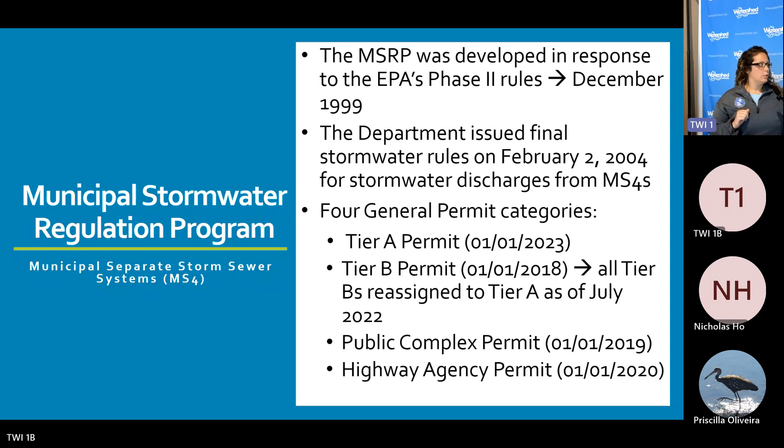So why do we need your help? Currently towns are required to submit an illicit discharge form with their annual report. Currently we've had none or very few notifications from towns about any stream scouring. We've had pretty poor compliance. And our thought, as well as many other groups, is: are there really no illicit discharges or any stream scouring cases across New Jersey in the 20-ish years that the program's been implemented?

So we are looking to record observations of stream scouring and illicit discharges at outfalls during any type of fieldwork inspections that you're performing, if you're with a municipality or a volunteer group. These observations will be forwarded to the towns to correct these issues, and then we'll discuss a little bit with Kristen how this data will be used.

Okay, cool. So now, as Tim talked about before, mapping is really going to be aiding the stream scouring and the illicit discharge aspects of the permit. So the first thing that you're going to investigate at each outfall is stream scouring. So what is stream scouring? It's the erosion or removal of stream bed or bank material by the physical action of flowing water and the sediment that it carries. So these are just a few examples of different outfalls here. The one on the right, you can really see the cutting away of the sediment right on the edge of the outfall there. And that's kind of what we're looking at when we're talking about stream scouring.

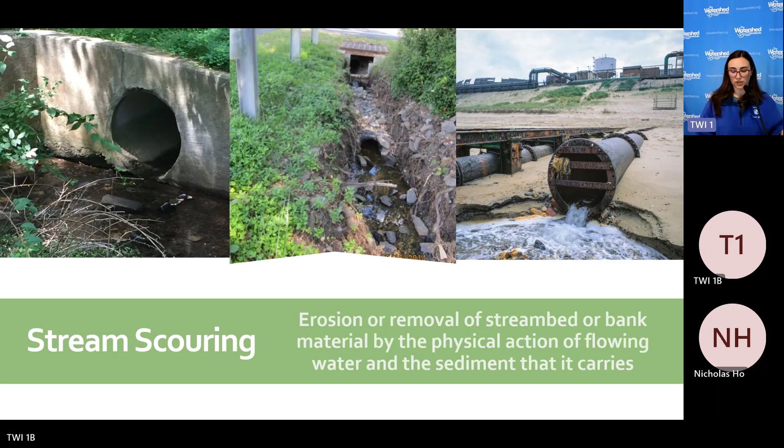The next thing you'll look at is bank stabilization, which is sort of similar, but it's a little bit different from stream scouring as it's concerned with the entire bank of the water body, not just the direct area surrounding the outfall. So on the form that you'll be filling out, there's going to be 3 different options: good, fair, and needs stabilization. So use your best judgment when you're trying to fill this out.

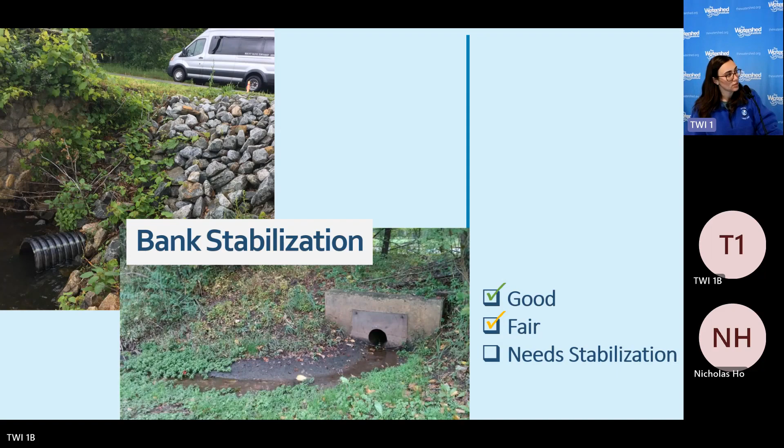So this example here might be an example of good bank stabilization. You can see all the riprap on the edge there, all the rocks helping to stabilize that soil around the outfall. This one here is going to be maybe fair. You can kind of see the stream bed is exposed here. And then this one here is going to be an example of a stream where we really need some bank stabilization. You can see all of the cutting away of the edge here.

And again, use your best judgment. We're giving you 3 options. Just use your best judgment. And also, it's really helpful if you take photos. It'll help us get a better idea of what we're looking at since we're not going to be out in the field with you.

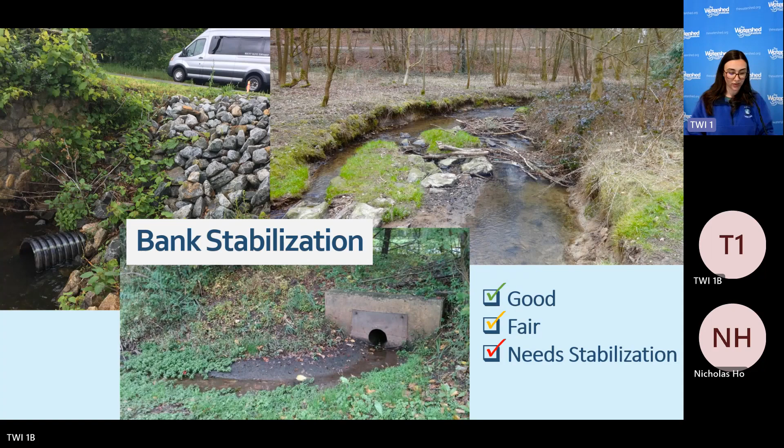Next, we're going to ask for any instances of illicit discharges. So again, Tim kind of went through this before, but it's basically anything that's not stormwater that's coming out of stormwater pipes. So typically you'll see things like domestic sewage, process water, wastewater, and any other non-stormwater discharges like Tim mentioned before. You might see laundromats connecting to MS4 systems.

The biggest indicator of an illicit discharge is going to be what we're calling a dry weather flow. And so that's a flow that's occurring from an outfall 72 hours after a rain event. So if there hasn't been a rain event in three days, there shouldn't be any water coming out of the stormwater pipes. So if there is, that's going to be evidence of an illicit discharge.

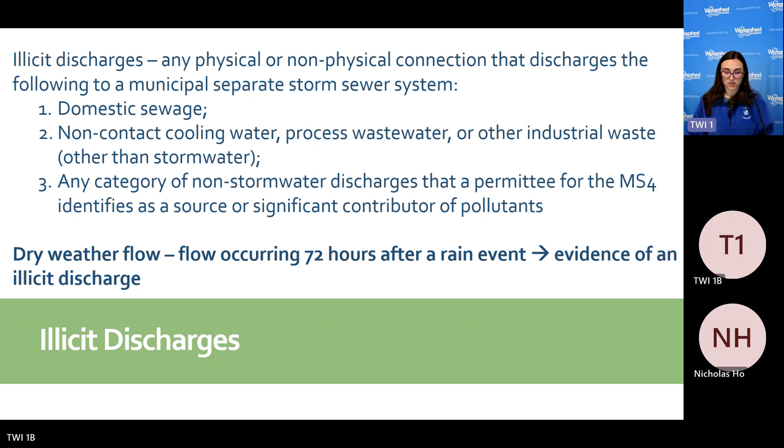Here are some pictures of illicit discharges. So the one on the left here, you can kind of see the water's really sort of murky and shiny. And then on the right, you can see the red color. So typically, again, you'll see the dry weather flow, but another good indicator of an illicit discharge is going to be an extreme odor or some sort of vibrant color.

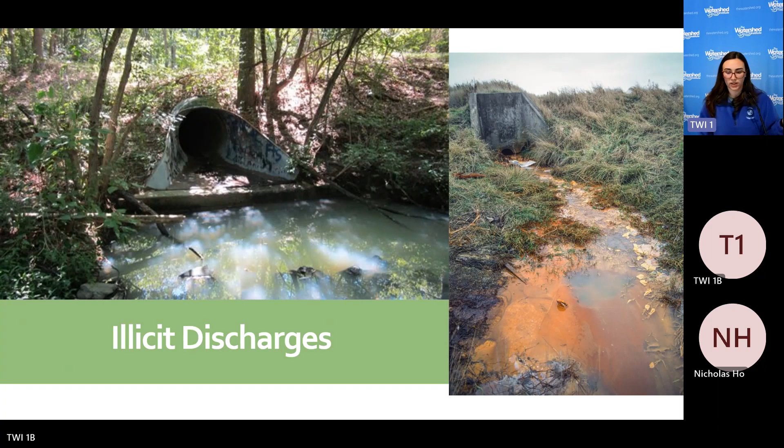So on the form, we're going to ask to identify if there's some sort of foam or oil discharging from the outfall as part of the illicit discharge investigation. And it can be tricky to determine these because sometimes you will see natural oil and foam in a stream.

So how do you determine whether it's naturally occurring or whether it's an unnatural presence, and that's an indicator of an illicit discharge? An unnatural foam is going to likely have a fragrant odor and be sudsy and soapy in appearance. It could also have an odor like raw sewage, and it might be bright white in color. And usually you'll see this coming directly out of the outfall pipe.

Then you'll have naturally occurring foam. That's going to be more of an off-white color. It's going to be caused more from the churning of the water. It won't last long. It might have an earthy odor or more of a fishy odor as opposed to that fragrant, soapy sort of odor. It's usually most prevalent after a rainfall, and you can usually see it downstream of the outfall as opposed to right at the discharge point.

And then next, you're going to have unnatural oil. It's going to have an iridescent appearance, so you'll see a sheen on top of the water. It'll have more of a gas or petroleum sort of smell. And when you try to swirl it around or disturb it, it's going to stick together. And then last, you'll have naturally occurring oil, which won't last long if it's disturbed. When you try to disturb it, it'll break into angled portions.

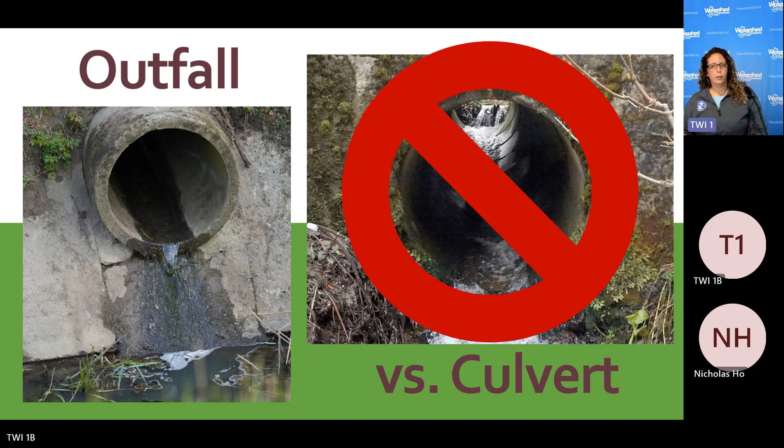That's a good question. So she said, how do you know that the pipe is coming from the MS4? So that would be part of, whether you're going out to map as part of your permit requirements, or you're leading a group of volunteers out to look at the health of a stream. These pipes can be from other facilities, not just MS4. They can be industrial facilities. They can be private facilities. Not that we don't care about those, because we do.

So if there is some form of illicit discharge or there's damage to a pipe or things of that nature, please absolutely report that. And then we'll be able to further investigate, either contacting the permittee or the municipality, and go about it that way.

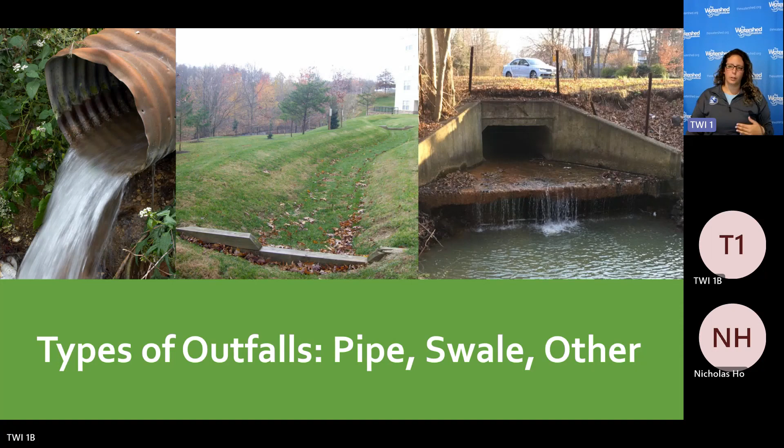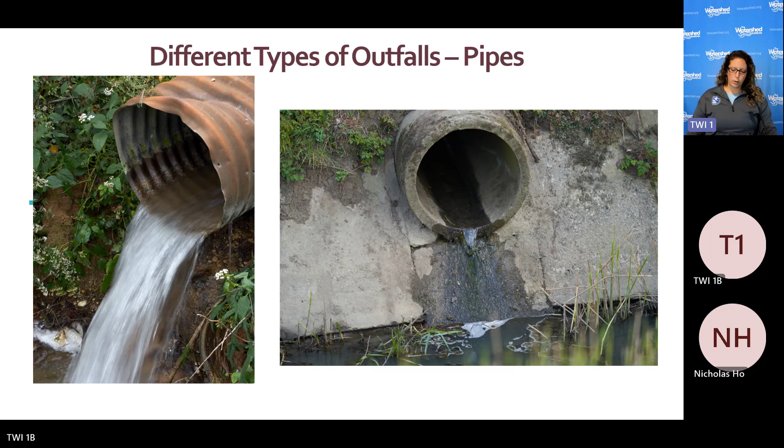And then we have, again, different types of outfalls. These ones are piped. They can be made of a variety of different material, PVC, concrete, or metal. And then here you can see these are also still piped. They just have a head wall associated with them. Some of them may be concrete, some may be a bulkhead, metal.

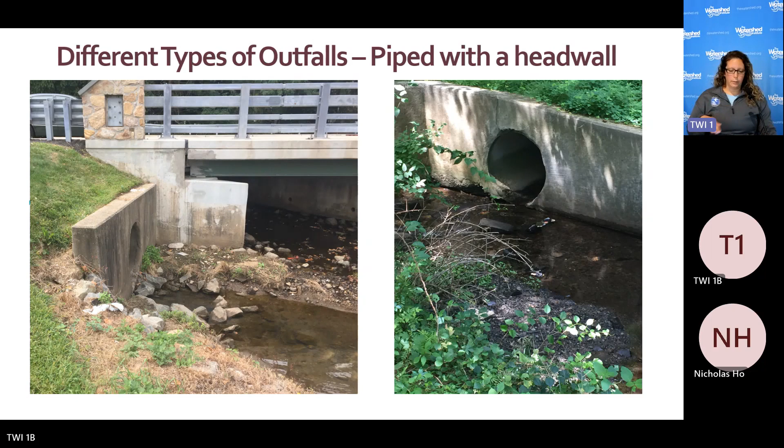And then you can see on the left the stones and riprap on the stream bank adjacent to where the runoff discharges to the stream. And then on the right, you can see a little bit of stream scouring starting to form on the left-hand side of the pipe. And we also have pipes that could be submerged, as you can see on the right, or some that are adjacent to a stream, so within the 10-foot buffer.

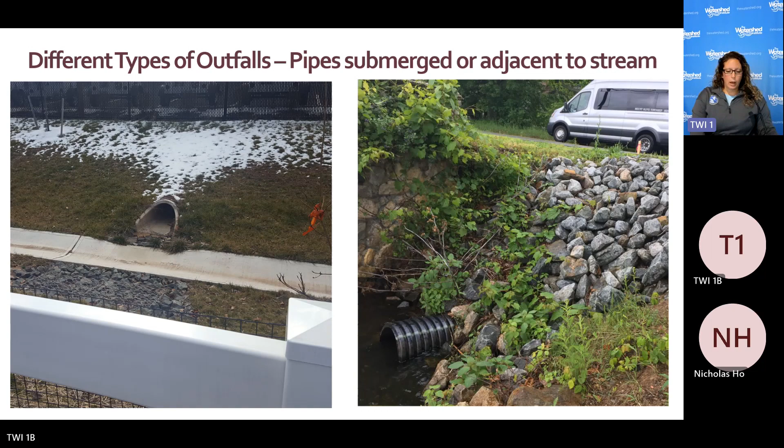And then beyond that, you could have a grass swale. A grass swale is a stable channel lined with vegetation. It's used to convey stormwater runoff to surface water. Swales are indicated to reduce suspended particles through infiltration and settling, and they're best suited to treat runoff from impervious surfaces. So sometimes these can be confused with conveyance, where a swale will link two different parts of the MS4 together. We're looking for a grass swale or ditch that leads into a surface water body.

These are some pictures of damaged outfalls. They come in a variety of forms, and they may be considered damaged for a variety of reasons. Use your best judgment and always take pictures and submit it. The outfall on the left is an example of stream scouring, poor stabilization, and structural damage. And then on the right, you can see one that is extremely structurally damaged and needs bank stabilization. Both of these could cause flooding issues in the MS4, as well as increased pollutant loading in the local watershed.

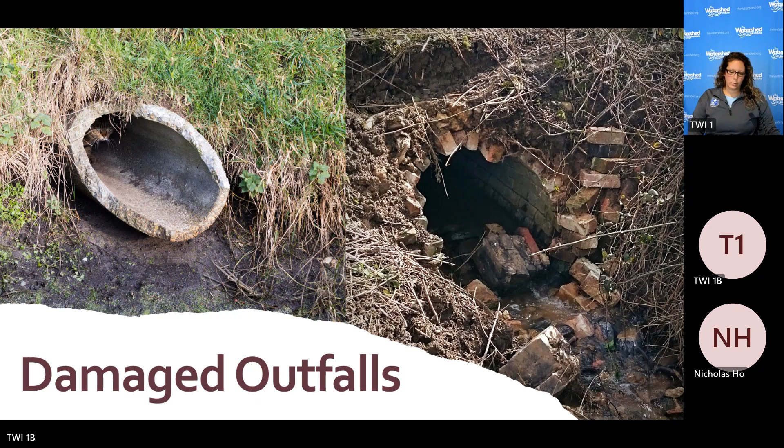And then I'm going to give it over to Gabby, who's going to explain the form that you guys have and what you do when you come across one of these things.

So there's two ways you can submit data to us. One of them is if you prefer paper, feel free to take this form. I can also email this form to you as a fillable PDF. You can print it, bring it with you, scan it, whatever is your preferred method of collection.

But we also do have a SurveyMonkey, which is this same exact form, but you can actually submit it to us directly and it goes straight to my inbox and I get to review it. If you look on the form, there's a QR code. Feel free to scan that QR code and it will bring you to the SurveyMonkey, which I'm actually going to go through, and we're going to use this lovely outfall.

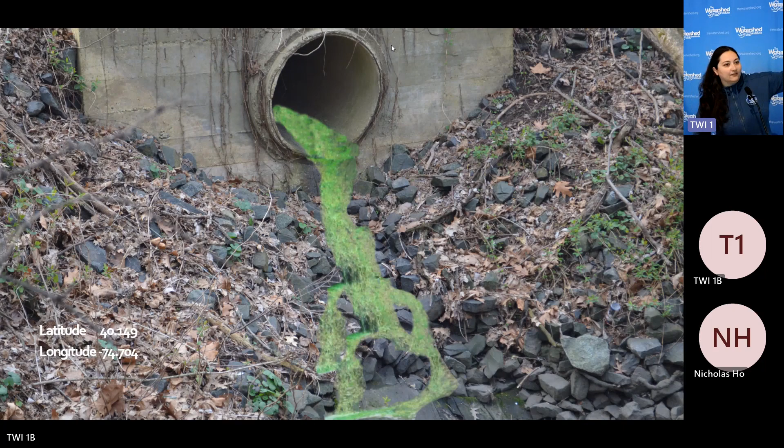Don't worry, this is photoshopped. This is actually a local outfall near my house. So as you can see, the latitude and the longitude are here. So that is something we would really like you to have. It's not required. So if you want to follow along with me, feel free to scan that code or the one on your screen.

So we're just going to ask for some simple information. So date and time. It's 11. Feel free to do these at night. I don't recommend it. So we do ask you to put your name so we do know who's doing it. And if you want to put your email, feel free.

But put in, if you don't know, the approximate longitude and latitude. If you don't know, it's okay. We can look it up on our end. It's important to know which municipality you're in. So this happened to be in Bordentown City. And then the county for this is going to be Mercer. So you can just pull down the screen and choose which one you want.

And if you happen to know the receiving water body, that'd be great. I do know this is the Delaware River. Spelling is not my strong suit. And then it's going to ask you what type of outfall this one is. So anyone want to tell me what type of outfall that was? Yes, it was a pipe.

And the other thing is, if you hit a pipe, you're going to notice on the sheet that it asks you for the approximate size of the pipe. On this, if you choose swale or other, it's not going to generate the question for the size of the pipe. So for this one, it's about 12 to 18 inches. If it's bigger than that, just put that there.

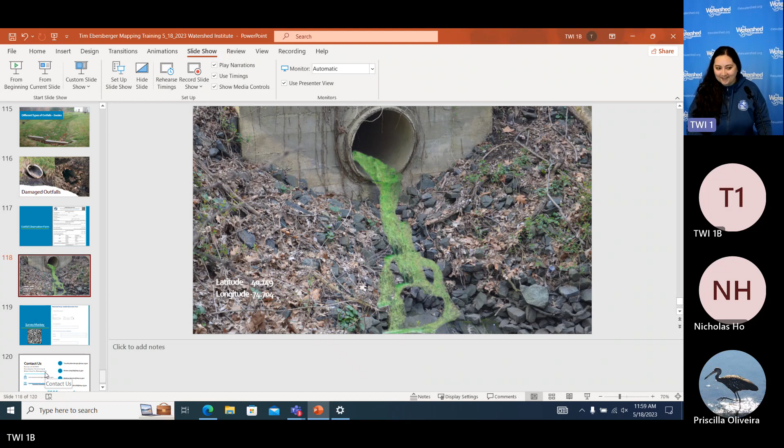Feel free to also use the paper forms and scan them and send them to Stormwater Manager with your photos and/or videos. We really want to see this data, and we will pass this directly on to the municipality and be like, hey, there's something going on. And then they have to do a formal investigation to determine and eliminate the illicit discharge. I've found on a lot of EPA audits that people are not doing this, and then EPA gets involved, and it's not a fun process.

So these are all of our emails. Feel free to email us, and especially if you have website questions, you can email me. I'm the one that does it. But yeah, we really are happy that you guys are helping us with this and to keep New Jersey's water safe and clean.